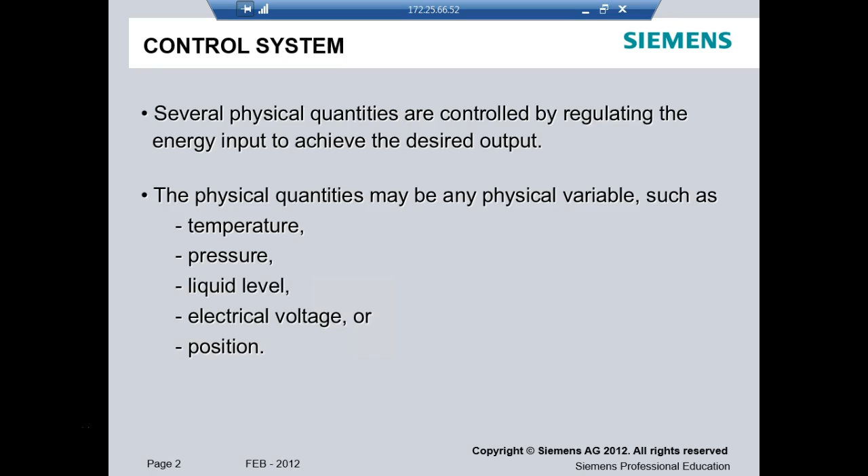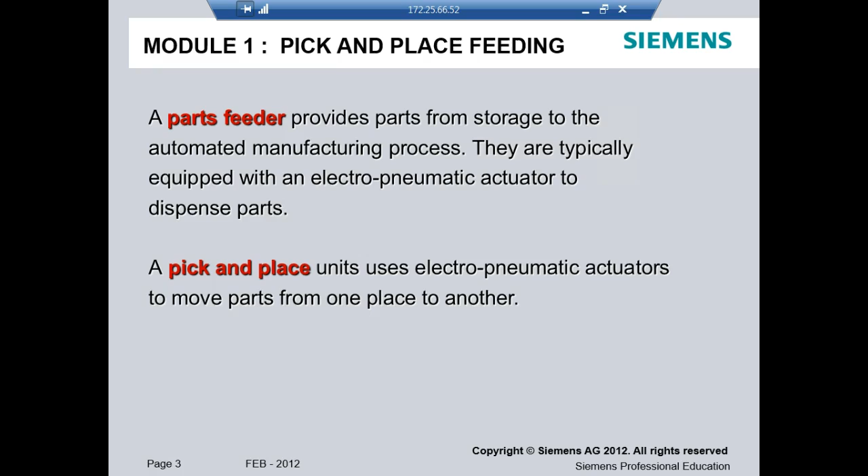You understand that? So what we're going to do is, y'all aren't going to work on this station. We'll look at this station and figure out what it does. And then, yeah, this is module 1. This is the one we'll look at and see how to set up this sequence chart.

And so first thing we need to do is be able to identify what's what, right? So we know this belongs to actuator 1, because it's 1A. So if we see A, it means it's an actuator. And what does an actuator do?

Turns energy into motion, right? Of course, we're using either pneumatic energy or electrical energy. So we have a lot of pneumatic actuators over there, but we also have a lot of motors and solenoids and stuff like that.

Sensors are labeled 1B1, so this shows us this double action cylinder, and then it shows us where all the sensors are. So this is the magazine that we put the blocks in. So right up under that magazine is B1, right? You see it? So if we looked under there, that's the parts present sensor. And then if B1 is present, then we'll start getting in sequence.

So first of all, before anything happens, B1's got to be true, right? Well, that's not really true. What should happen first? Well, first thing we should be able to turn the power on, turn on the outputs, and then what do we do? We cycle it between what?

Okay, and then on this one, you'll have to hit the start button. After that, the whole thing's automated, unless we have it in what we call single step. So what's nice about this manufacturing line is you have the ability to put it in manual, and you're going to single step it. So this is what we'll do when we set up this sequence. We'll step it, and then step it and step it and try to figure out what has to be true.

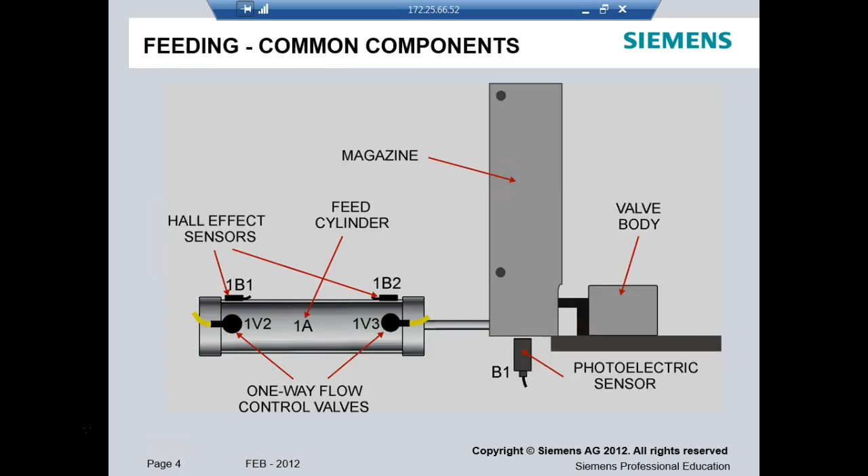And then, of course, so if this guy here is extended, which means there's a part present, right? Because it wouldn't extend it if there wasn't a part there. Everybody okay? Then that tells this guy, and this guy's retracted. Now it should be able to do what? To send this thing down.

And then when it's fully extended, how do we know? How does it know when it's fully extended? Because 3B2 becomes true, right? Everybody follow this? So when 3B2 becomes true, what's it going to do now? Should turn on the vacuum. And then it's got a sensor that indicates if the vacuum is present. But that's the other side of the line, right? Everybody okay?

So this is showing us the parts. So we know here's our Hall effect sensors here, right? And then we can't see the Hall effects over here. This is the B1, it's up under this, and it's pointing straight up. It's a diffuse sensor, so it's pointing straight up and reflecting off the line.

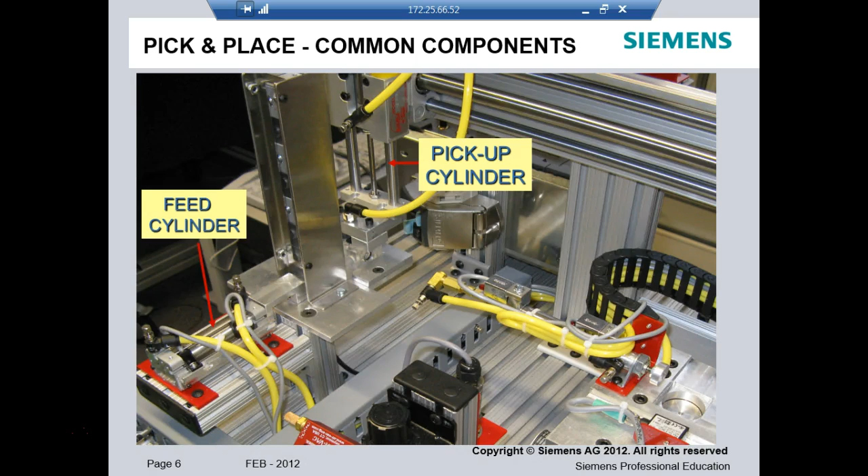And we talked about the vacuum generator, right? Yeah, we actually went over and showed y'all the pressure switch that's on the vacuum line. How does it know it's generating a vacuum? Yeah, what did he read? It's a vacuum switch. Well, it's not. It's a pressure switch. Because if it's coming out the suction cup and blowing straight out, because it's not on it, it's sucking in, it's not up against anything, right? Then it won't be able to generate pressure. Okay. Y'all understand that? How can we get a vacuum from a pressure?

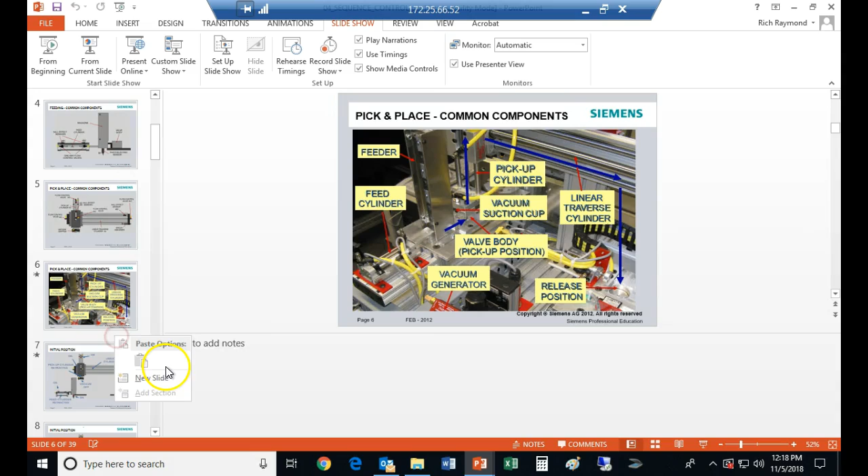A vacuum from a pressure. So this uses, both the lines use what they call a Venturi, a vacuum generator.

Well, sort of. How does an airplane fly? How does it create lift? So y'all don't know how an airplane flies? Really? Y'all really don't? Y'all haven't ever heard this before? Well, what happens is that we enter air into the front of the airfoil, which is the wing. A wing is an airfoil. And if you ever looked at the wing, you'll notice that it's what? You know it's curved on the top and flat on the bottom.

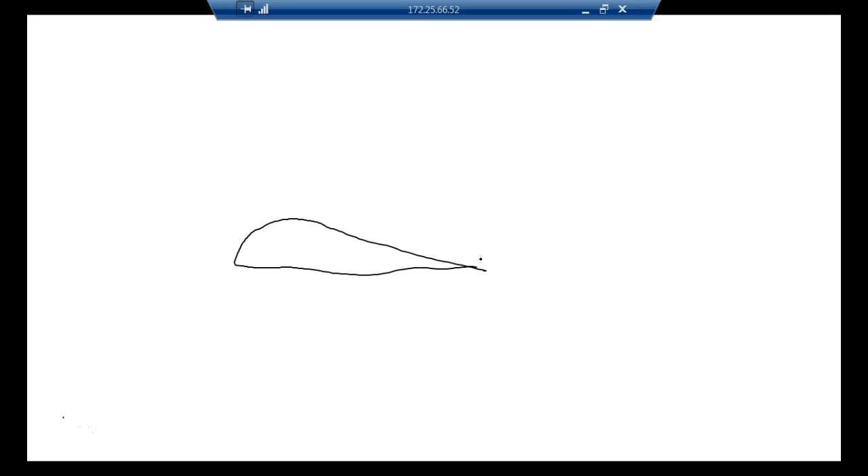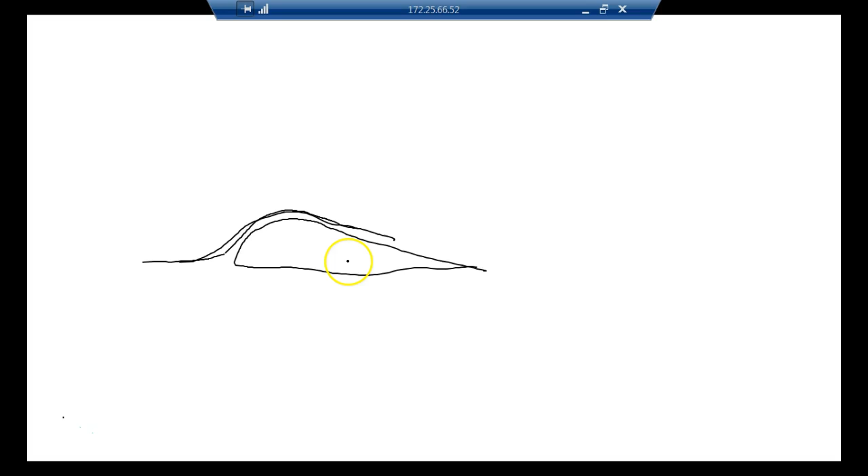So what happens is your air comes up and hits this. This flows over the top, and so this starts moving real fast. So the faster moving air creates a vacuum, which causes low pressure. And then the bottom one comes over here. It's moving straight, so it generates a high pressure. So it going over the top of that wing, that curve over the wing creates a low pressure. On the bottom, we have a what? A high pressure, and creates lift.

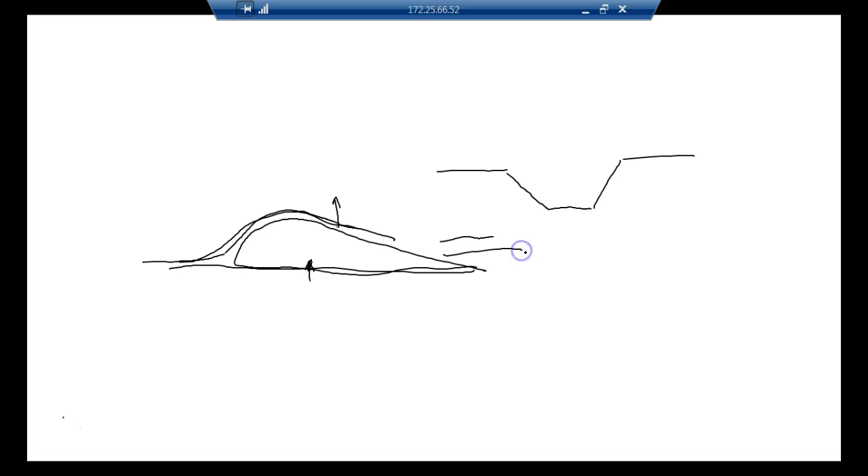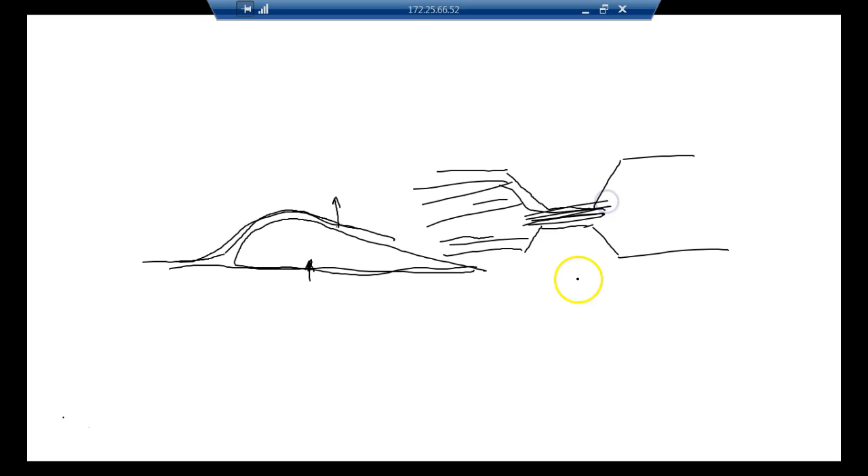So if we can speed the air up through an orifice, then we can create a vacuum. So a Venturi sensor comes down here, narrows down, goes over like this, comes back up, and comes like that. And then the other side looks basically like this. And then when the air comes through, what's it got to do? It's got to flow through that, and it speeds up going through here and creates a vacuum. So we put a little tap right there, and now we got a what? We got a vacuum. And this is what a Venturi vacuum generator does.

So what we do is we take pressure from our compressor. Our compressor don't create a vacuum, it creates a pressure, right? You understand? But we run it through the Venturi vacuum generator, and it generates that low pressure.

We use this all the time, guys. Anybody got a pressure washer? You've got a tub on the front of it. Why doesn't the water squirt up the tub? Because it runs through a little venturi and creates a vacuum. So if you put soap up in the top, what would it do? It'll just suck it right down in there and add it to your water. So anybody's got a pressure washer, basically all of them have that plastic tank on it that you can add soap and stuff to, right?

So anytime we speed things up, then the pressure is going to go down, right? You understand? And we use that all the time. Airplanes, that's the way they fly. It always amazes me that you got them wings out there that creates enough lift to do what? Pick up all of you. And that the wings are the only thing that's technically generating the lift.

The wings on the U-2, I don't know if you've ever seen a U-2 fly before. It was one of our first spy planes. Those wings are so long and so thin that they flop down. When the plane's trying to take off, since it's only got two wheels down the center of the plane, and the two wheels out on the wings are just propped up under there, you can see the wings come up, and then these things go bouncing down the runway, and the Jeep comes up and does what? Picks them up. And when the U-2 is fixing to land, coming down, this Jeep's right behind it. You understand? The pilot brings it down, and they'll jump out and hold the wings up. So the U-2 is a neat airplane.

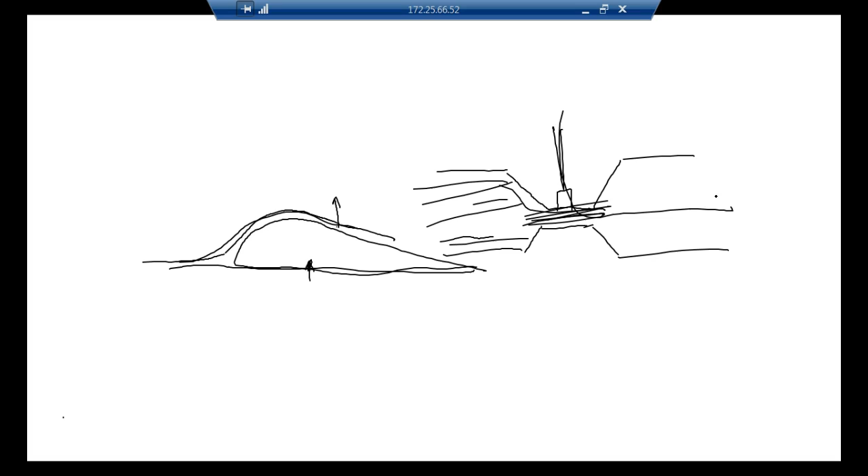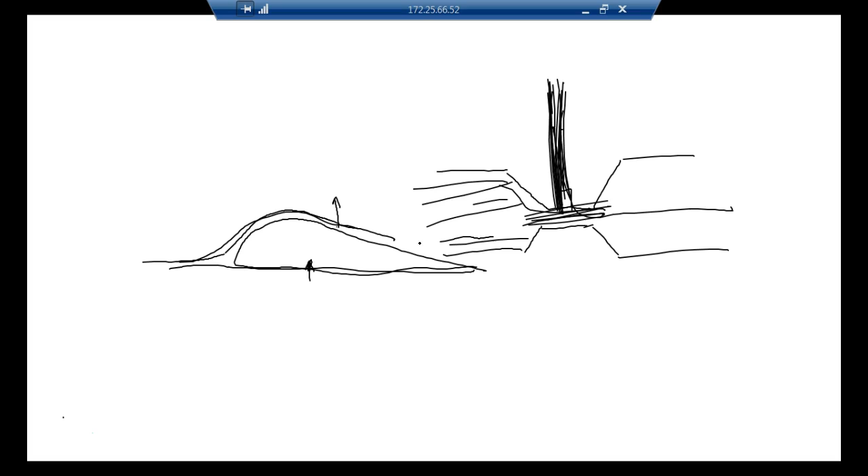So this is the way our vacuum generator works. Well, the problem is if we let this air come through here like that, then it's not going to be able to generate pressure, right? You understand? So that's the way the pressure switch works. The pressure switch is sitting right up here. So it's sensing the pressure, not the vacuum, but until the suction comes down and locks onto something. So we're using a pressure switch, but the pressure switch is sensing when the vacuum is made. And it happens every once in a while, the little vacuum cup will literally come up and flip up like this, and it won't generate a vacuum. It'll just sit there. And we have to bring it back up and flop it back down because it's very pliable, I'll say.

Well, it depends if you take care of them. If you come up here and jerk on them and stuff... we've had the Festo line since 2006. And yeah, it eventually gets worn out. But if you ever notice, they just screw in pretty easy. In fact, we've got one on the Festo line over there. We had one where it wouldn't pick up the blocks, and we thought it was the suction cup because it had a little nick in it, but it wasn't that. Somebody had turned the pressure down on the regulator, and it wouldn't generate enough vacuum to pick up the block.

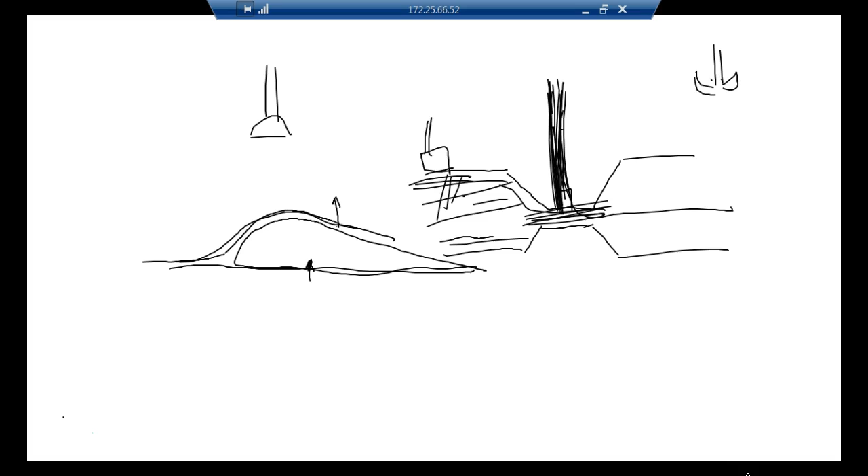So that's the way airplanes fly. So the venturi works on exactly the same principles that airplanes do.

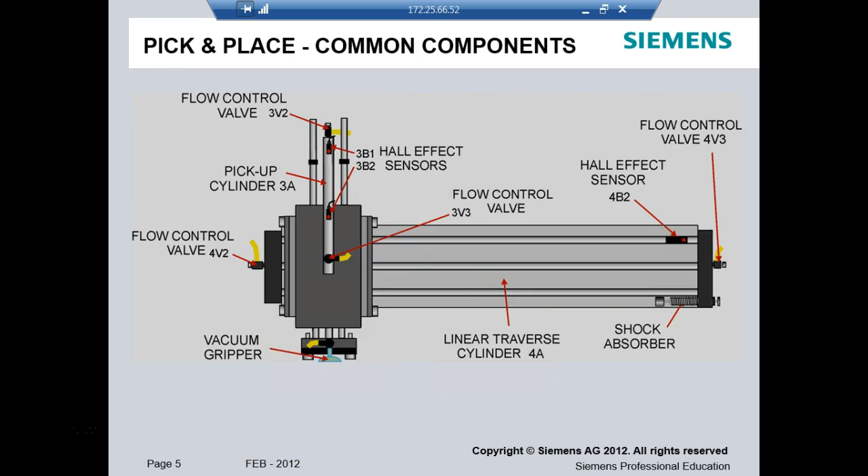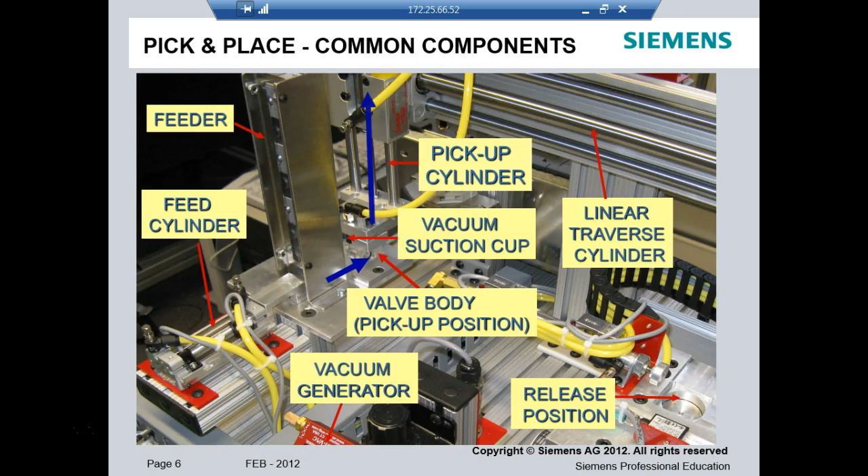Feed cylinder, pickup cylinder, vacuum suction cup, vacuum generator, valve body pick-up position, so it's out, right? Okay, so I think we'll have the actual procedure here in a second.

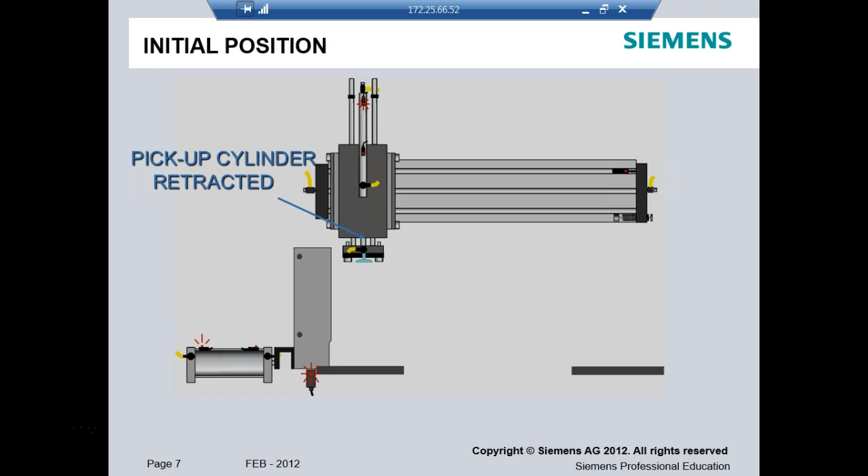So this is where we're starting out. So what's got to be true before we start everything? One, B1's got to be true. It's got to be true, and then of course the one we can't see is the one that indicates that it's on the left. If all those are true, then what's going to happen? It's going to send out the block, right?

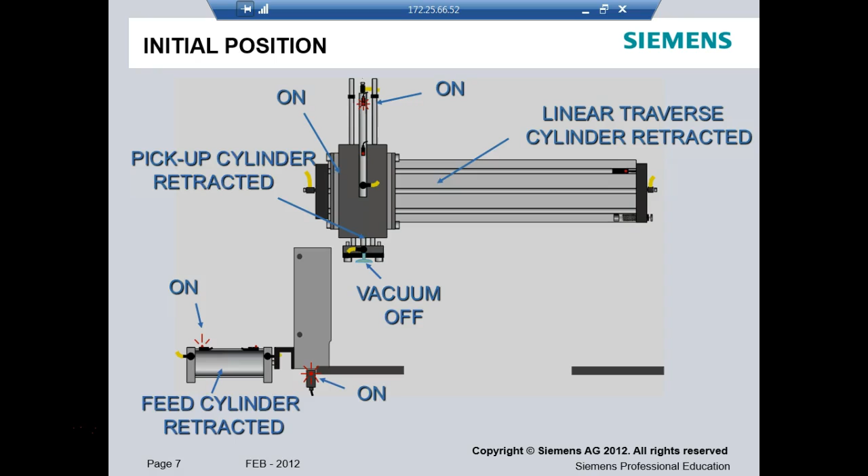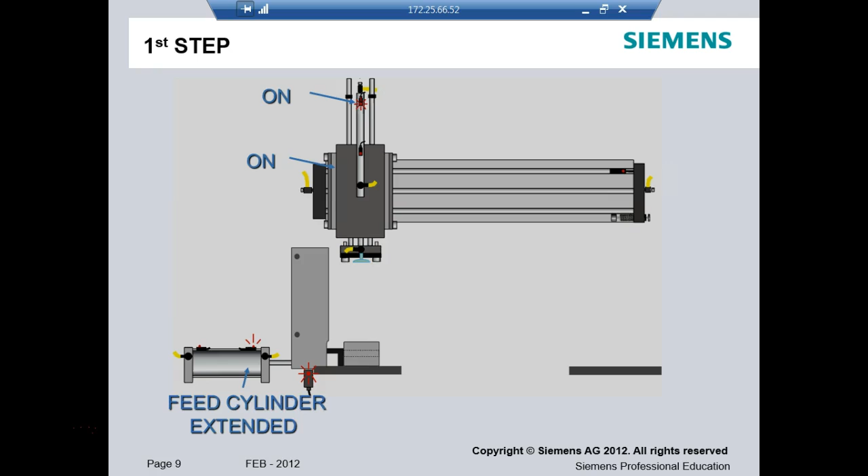Vacuum off, cylinder this, and we're on the left position. If all this is true, then what happens? Send out the block, right? Now, how does it know the block's okay? Well, all of a sudden this guy right here comes on, which says it's fully extended, right? That light is on. Valve body's in place. So what's going to happen?

And it's going to go down, and how does it know it's down? This is still true, this is still true, this is still true. I'm sorry, this one goes false, this goes true. No, it knows it's fully extended. So what's it going to do now? Turn on the vacuum, right? You understand that? Everybody okay?

So it comes up here, and this is on, this is on, this is on, right? So it's going to turn on the vacuum. Everybody okay? Vacuum on. Then what's it thinking? Okay, so the vacuum's on. How does it know the vacuum is on? Because the little pressure switch says it's on, right? Okay, so then what's it going to do?

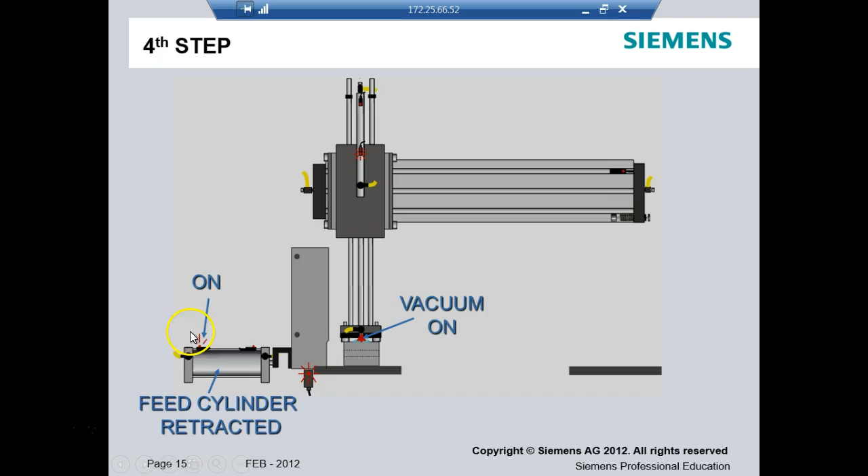Vacuum on, it's going to retract this, right? How does it know when it's retracted? Because this guy here goes true, right? Then what's it going to do? It's going to pick it up. Are we okay so far? How does it know it's up? It knows this guy's fully retracted, right?

It knows there's still a part present, but this guy right here goes true now, right? Everybody okay? So what is it going to do? Feed cylinder retracted, how does it know that? So it's going to move it over to the side. Vacuum is still on, right? How does it know the vacuum is on? Because the pressure switch still says it is, right? Everybody okay? So what's it going to do now?

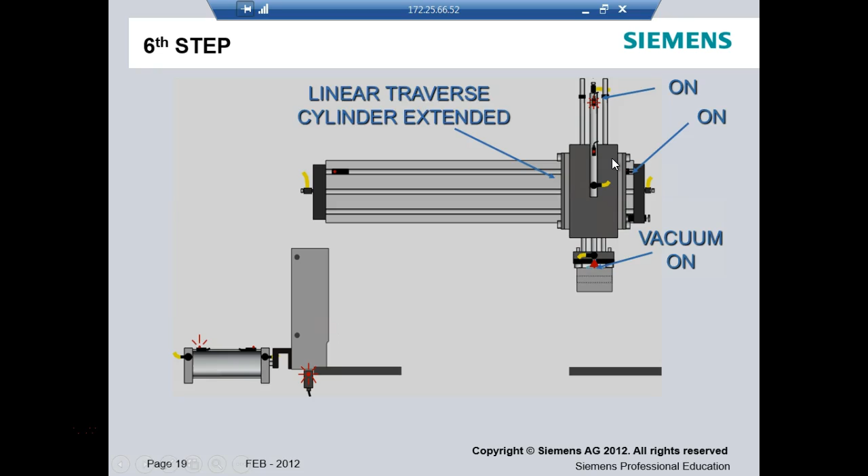Okay, so it's going to come up and now you can see this guy. So now it knows it's all the way on the right because of this sensor right here, right? Everybody okay? And so it's going to come up and do what? It's going to, okay, how does it know it's fully extended? Right, okay, then what's it going to do?

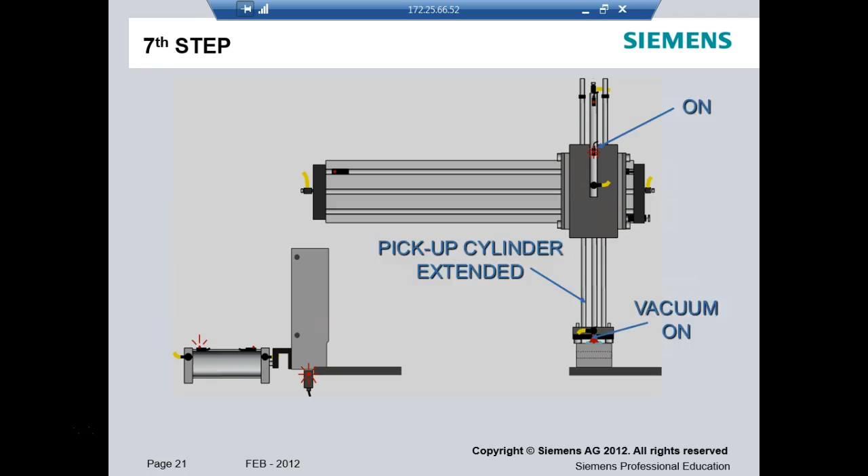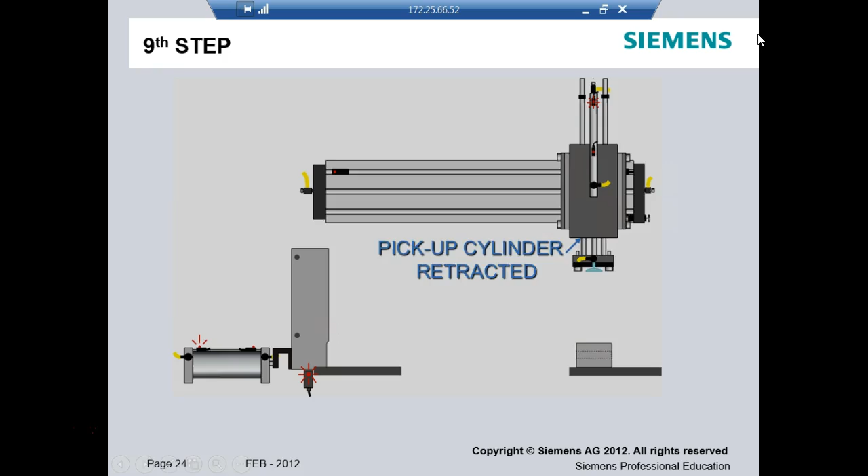Okay, on, right? It's going to turn the vacuum off. Then it's going to retract. How does it know it's retracted? Yeah, then what's it going to do? Okay, pickup, retract, it's going to move over. How does it know it's over? Because of the sensor that it just covered up.

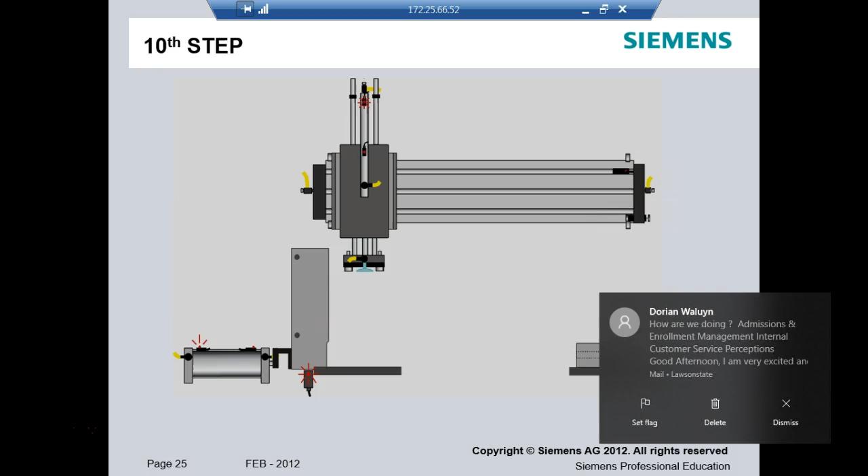And what's it doing now? Waiting on the next cycle. So what we did is we just stepped through a complete cycle, right? Everybody okay? So I really like this line. We can literally, we can put it in manual and press that green button. Every time we press the green button, it's going to do one step, right? Everybody okay?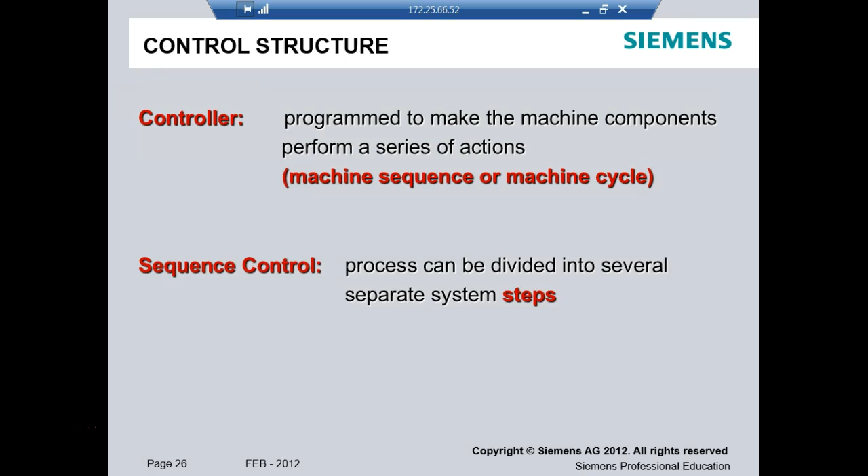So automated systems are basically sequence controls. It goes through its sequence and then it ends up where it started out, right? Everybody okay there? And then it just keeps doing the same sequence over and over and over. We've already talked about this, the three things that make up a control system. We have input, we have the program or the logic, and then sooner or later we're going to generate outputs. Everybody okay?

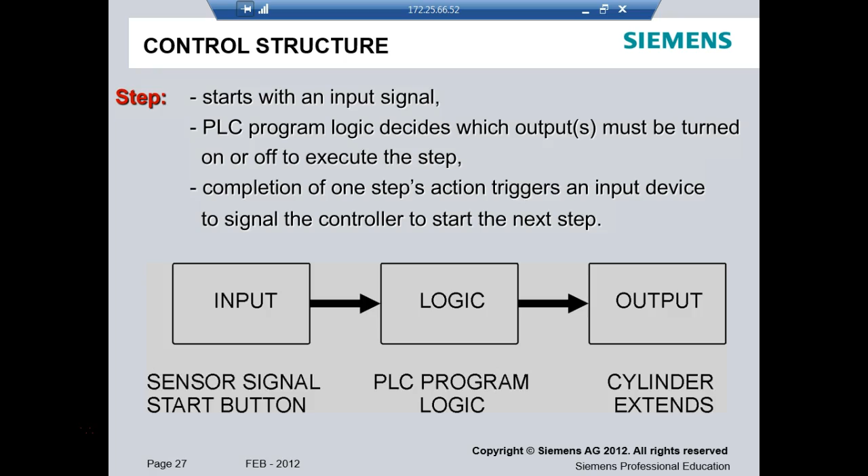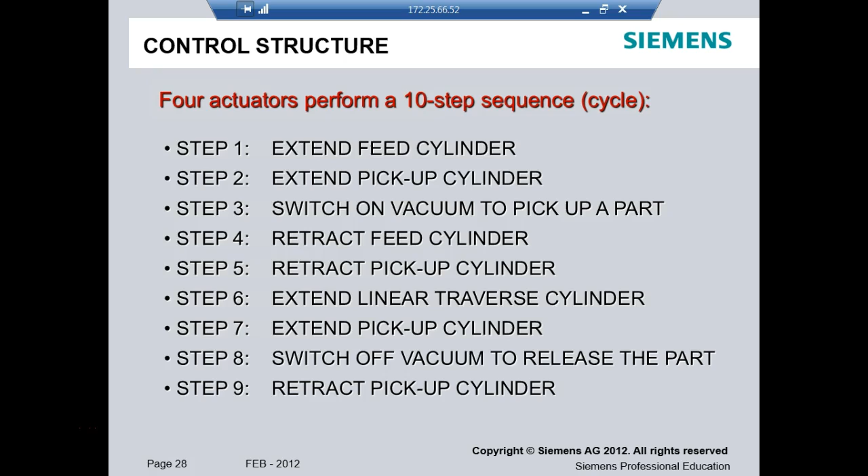So this is the way it's happening, push button, right? So your start button is pressed, PLC picks it up, right? Cylinder extends, PLC runs logic, does this, extends, PLC logic, does this. So this is the sequence, and when it hits the next step, sorry, we still got some more steps.

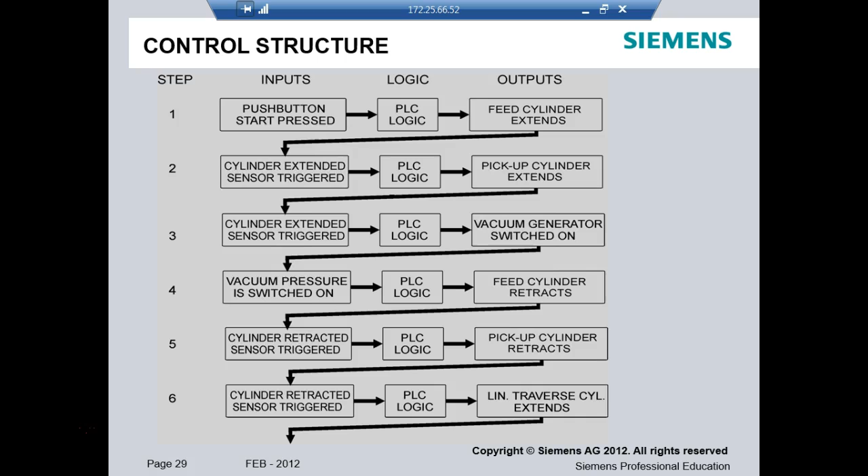Okay, so this is the actual function chart. This is the first thing that we're going to look at. So notice this thing has 6 steps. Now to get into it right here, this says this is what we need to have. It says 10.1, which is 4B1, has to be, and B1, and the little up arrow means 'and,' right? So it means they all have to be true. B1 and 2B1 and 3B1 and 1B1. If all these are true, then it'll go into step 1, right? Does that make sense?

So what does it do during step 1? Well, what it's going to do is turn on output Q4.5, which is going to cause what to happen?

Okay, and how does it know? What effect does this have? Well, 1B2 should become what? True. Everybody okay? This makes sense.

Now down here, this says this is what's required to get into the next step. What you notice, what this guy affected was what's required to get into the next step. So 1B2, which is hooked up to input 1.3, and we'll show y'all that. If it's true, then it falls into step 2.

Step 2 is going to output Q4.6, which is going to cause what to happen? It's going to cause this to extend, which is going to affect what? 3B2. If 3B2 is okay, then it's going to fall down into step 3.

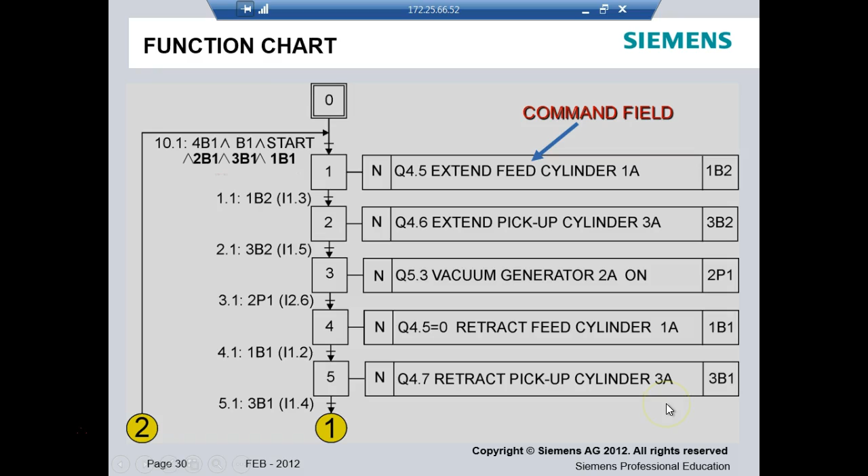Everybody okay? Of course, they run out of room, so they put some dots down here indicating it's going to continue on the next page. When we go to the next page, we'll look for the number 1, and we'll look for the number 2, right? Everybody okay? This makes sense so far.

So we got into step 6. So to get into step 6, then 3B1 has to be true. 3B1 is true, then it's going to turn on Q5.6, which is going to cause what to happen? It's going to extend the traverse cylinder, which is actuator 4A.

And how does it know it's extended? It's going to activate 4B2, right? Now follow me so good. If 4B2 is okay, we're going to move into step 7, which means what?

Q4.6 should turn on, which should cause the pickup cylinder to extend, which is actuator 3A, right? You understand that? Which is, how does it know it's extended? 3B2 will become true, right?

Everybody follow this. If 3B2 is true, then this is going to get us into step 8. It's going to turn on output Q5.4, which should turn what?

Generator off. How do we know? How does it know it's off? 2P1 says it's turned off now, right? You understand? And then it comes back in here.

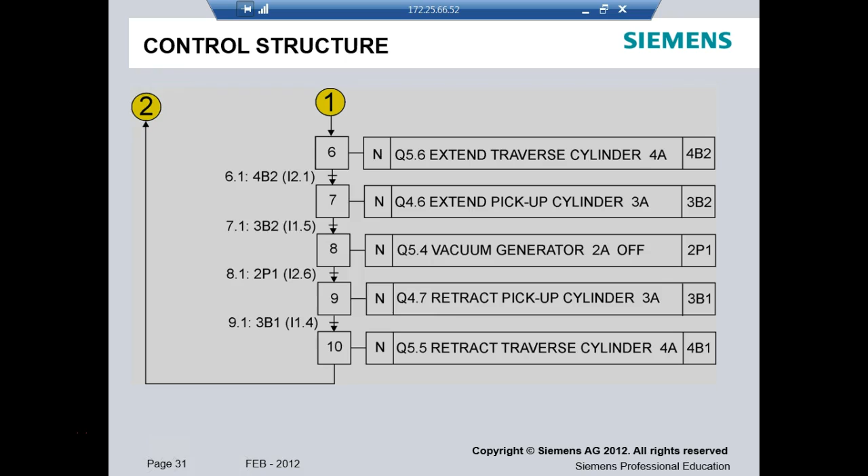It's going to retract the traverse cylinder, which is 4A, so it's going to move back over to the left. How does it know it's on the left? 4B1 becomes true, right? And then it does what? Then it goes back up to here, right?

That makes sense? And if we got it on auto, the start should be true automatically, right? You understand? If we don't have it on auto, then it's going to take all this stuff up here again, right? It's got to be all true, and then you got to press the start button, which is what you're going to have to do for manual.

So guys, this is a function chart. So I got this thing down here, and the pickup cylinder. Like I said, the first time I taught this class, we put a bug in the problem.

Guess what the guys did? The guys started all the way up at the very top. Is that where you're supposed to start at? You're supposed to find where it stops and then figure out what's required to cause it to do it, right? You understand? So let's say this guy right here did not retract.

Well, you'll figure out why 1B1 didn't go true, right? Why didn't this go true? Well, it might be that this guy here never retracted, or something's wrong with that sensor. And that's the beauty of these function charts, is you don't have to check the thing that you know is good. How do you know they're good?

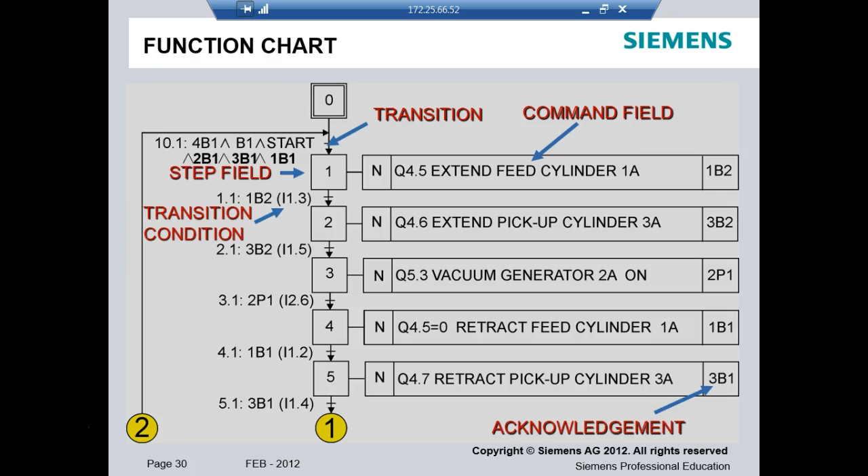How do you check? How do you know that sucker is perfectly aligned? As close as we can do. What would y'all look at? All right, you mean all of the...

So this is the information that we get with our manufacturing line. I think I have this all put together though, guys. I think... no. We get an overview, and of course it gives us a picture of the station.

Well, what we're going to provide with y'all - one thing that I like about the Festo line is it actually labels all the sensors. The Amatrol line doesn't label the sensors. Some of the same sensors that you saw in the Festo line, I see the same numbers on the Amatrol line. Well, it's not the same, it's the same numbering system. So that's a standard numbering system when you set up a circuit like that.

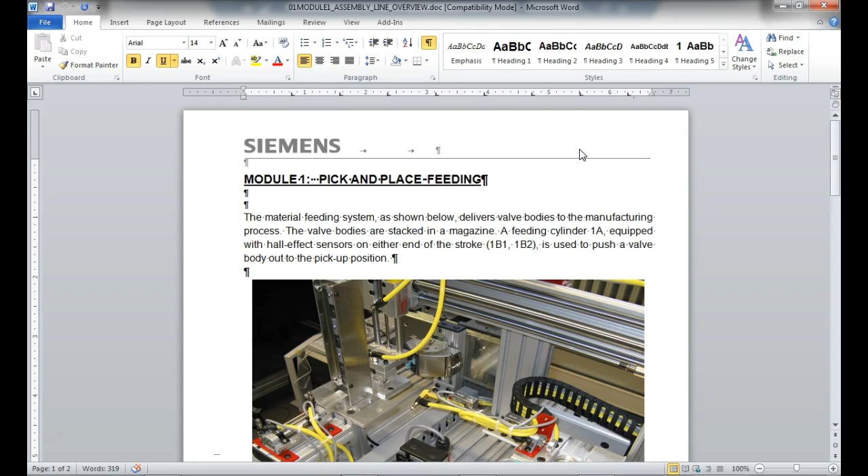So we got the B's, they indicate they're what? Sensors, right, or proximity sensors. A means they're what? I'm guessing now.

So just about every circuit on the Amatrol line and the Festo line, its function in life is to run an actuator. Because what does the actuator do for it? Yeah, it changes energy into motion. Of course, we got two forms of energy - what's our two forms of energy over there? Pneumatic and electrical, right? Those are two forms of energy.

So what they do provide, and I've run these off - depending on which section of the line you get on, and we're not going to work on 5 because that's the robot section, is that I've run these off individually. So what are these pictures right here going to do for you? The sensors are, and how they're labeled, right? Because you know when you do your function chart, that's what you're looking at.

So you go over there, you figure out what sensors are true before you press the start button the first time. And then that's what's going to be required to get into your first step, right? You understand that? That makes sense?

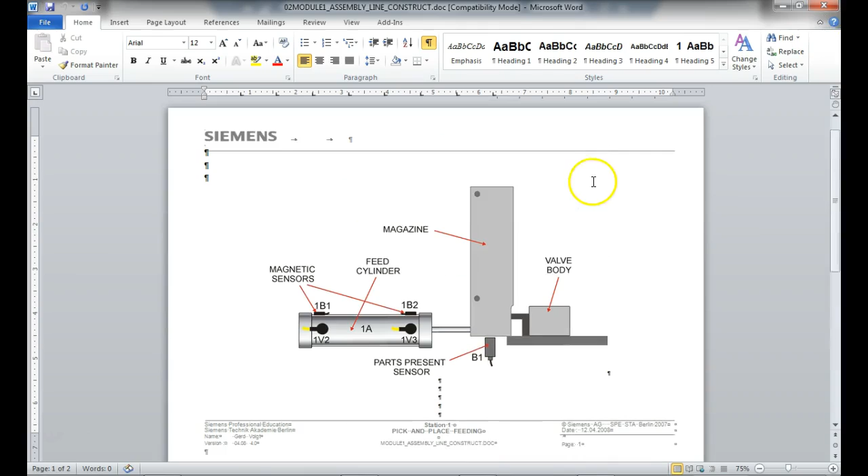So we have these for each section of the line where you can come in and identify what sensors you have. But these guys, these are pneumatic diagrams.

So these are some that we've already looked at. This is standard. If I brought up the one for the Festo line, it would almost be identical to this, because just about every circuit here is in there to run an actuator. And either the actuators are going to be electrical or pneumatic. They're predominantly pneumatic.

So the way it starts off, we have our service unit. This is called 0. Then from then on, this right here would be the first circuit. This is a directional control valve. What's M?

M is solenoids, so this is solenoid actuated spring returned. What's V? Valve, right? This is very important to know because this is the way a standard print should be laid out, top to bottom, left to right. It should be laid out basically the way the line is, so my first actuator is on the left and the last actuator should be toward the right. That makes sense?

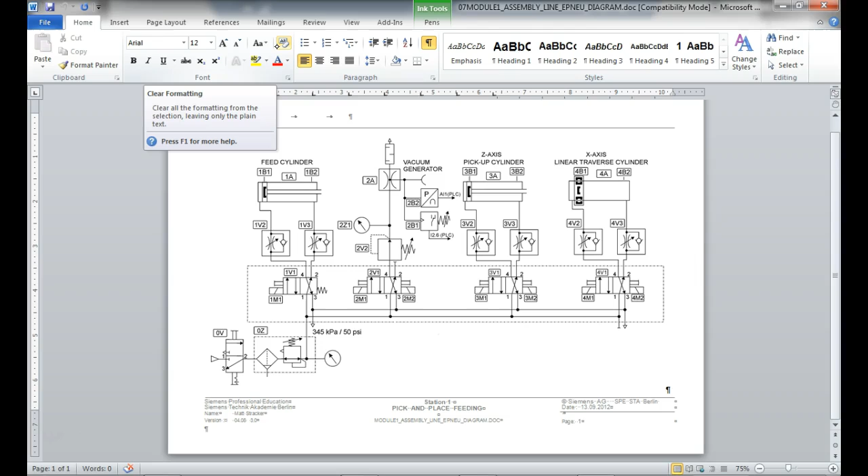So this is a Word document. I was looking for my PowerPoint. Yeah, I was trying to write on it. I can, but it's hard to do with the recording software.

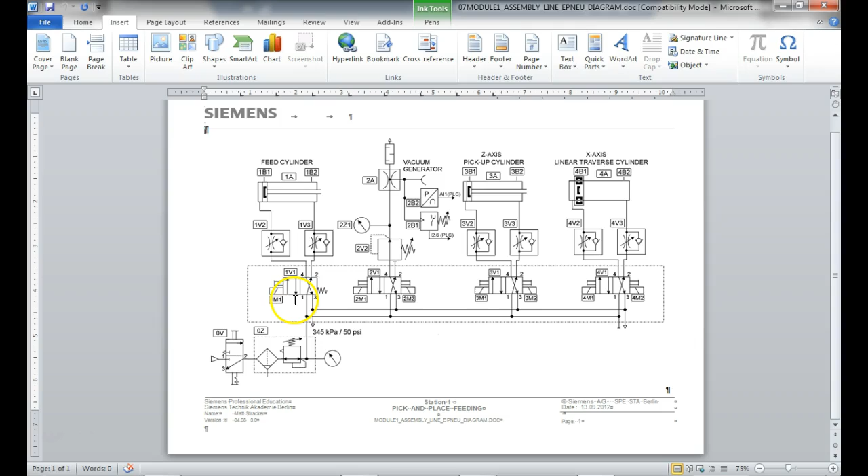So this is a directional control valve. And what's this symbol right here, that little white thing sticking up there? Manual override. Every one of these we can do a manual override on. And then we even have those on our relay.

These are unidirectional flow control valves, which means they only flow one way, and we're doing what we call meter out, which you can tell by looking at the check valve. This is called a check valve. The check valve basically only lets the fluid flow in one direction. If that arrow was pointing up, that would be meter in, but the arrow is pointing out, so this is what we call meter out. What does meter out mean? We talked about that the other day.

So the problem we have with pneumatics is if I was to push on that side, what's the air going to do as soon as the cylinder moves? It's going to uncompress, right? So what would happen? It would always be jerky. So what we do is control the flow of the exhaust, not the pressure of the exhaust. So now that cylinder's always pushing against something. The flow control is trying to keep the flow from flowing, and your pressure's trying to push it. So what happens is you always work against back pressure.

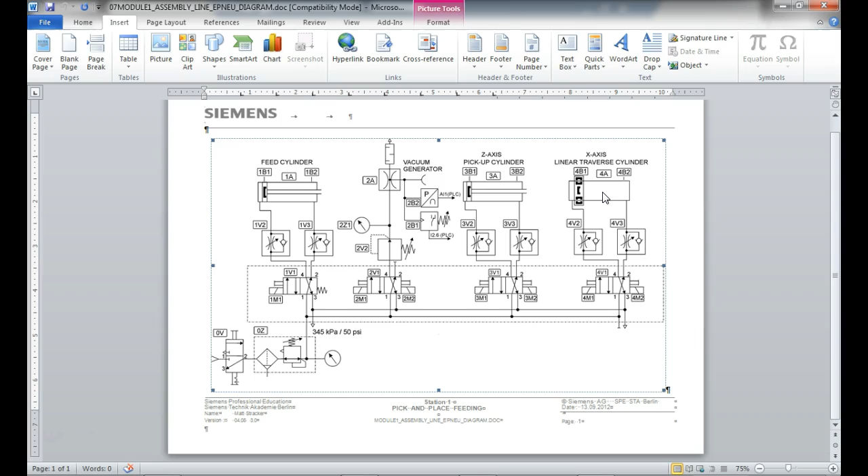So we've got pneumatics, we've got electrical. Of course the electrical is going to give us the actual way the PLCs are lined up. I think this is this one, I get them confused every time.

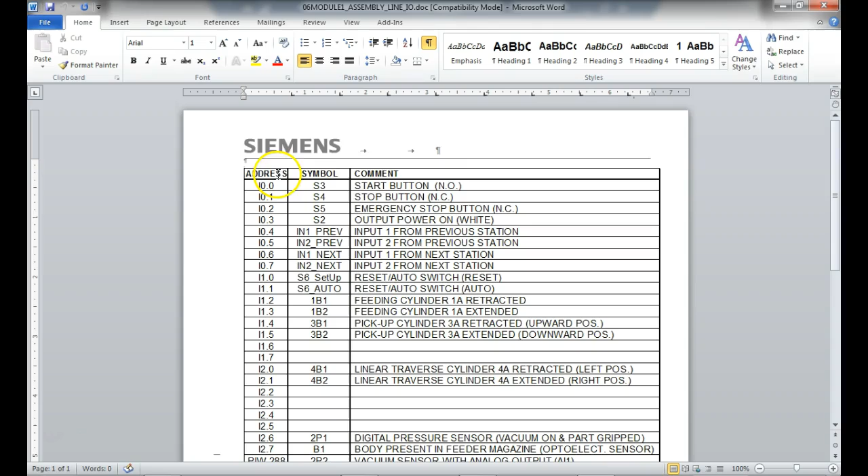No, this actually shows us what I/Os are assigned. So I want the other one.

Yeah, but we don't normally put these manuals up, especially while we're doing this lab right here. And why is that?

Because you would look at these function charts. These function charts are in there. The step charts are in there. What we're trying to do, guys, these don't have to be right. What we're trying to do is just give you the experience of developing these things in case you got somewhere that didn't have them, and now you have an idea of how to develop them. Some of them are complicated because they have different paths it could go depending on what happens, so you have a loop.

You come up here and you decide which way it's going to go. So let me find my PowerPoint, trying to find my bump out.

Well, we're going to be in lab. I mean, is there some reason you have to leave every class early? Every class. Last time you told me, but you didn't leave.

Well, yeah, you need to make appointments with her when you're out of class.

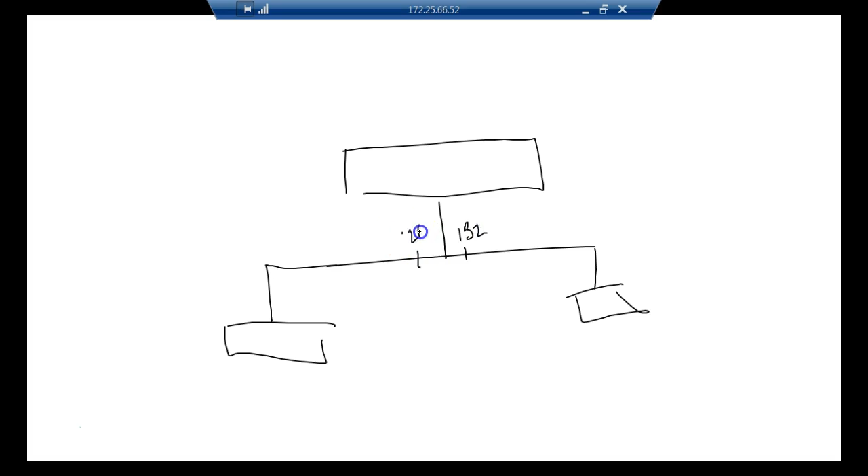So what we would do if we had a section is we would come down here and split it up, and then we come down to flow charts. Then you would put what's required to make it do what. So here it might be 1B2 is false, and over here it might be 1B2 is true. And if it's false, I think we put an overline or underline, I can't remember. That way you can indicate that your function chart goes two different directions.

But eventually they're going to do what? Eventually they're going to merge back up, guys, because they got to come back up to the start, right? I understand, that makes sense. So if you look at the conveyor belt, if it's metal, it goes one way. If it's ceramic, it does what? It goes another, it gets a different cylinder. So that's the way you would split it up into two directions.

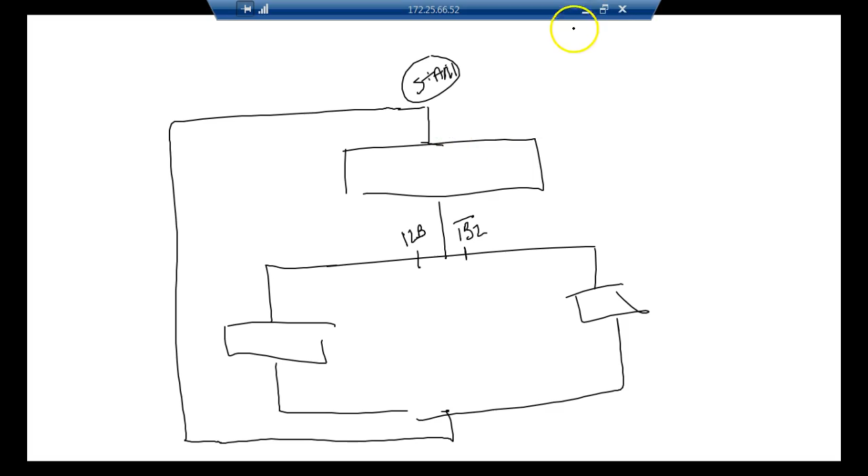Steps go across the top, right? If this will load... it says it's open somewhere. Oh no, this is not one.

So the actuators move between the steps, right? And that's basically kind of different from the function chart. In the function chart, the actuators move in a step, and then we put what's required to go through that. But a step chart, and we don't have step charts for the Festo line, one day we're going to try to do that.

So this is the step chart for the pick and place section. It starts at that first one that starts track. Well, no, not yet. What we do is this is what's required.

So what has to happen? 1B1 indicates that it's retracted, right? 2P1 says I don't have pressure. 3B1 says this guy's retracted. And 4B1 says this guy's retracted. Now if all that's true, then what can it do?

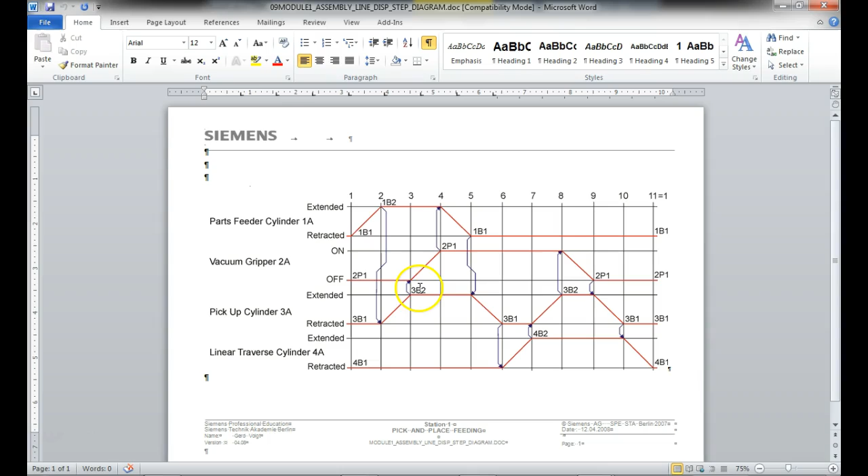2P1 is not true. What happens between step 2 and step 3? The pickup cylinder extends. And then once it's fully extended, it causes 3B2 to go true. And what does 3B2 affect? Well, 3B2 affects actuator 2A.

So what's happening between the steps is what's going on with our actuator. This is what's required to cause it to move to the next step. But what happens between the lines, inside the block, what's happening? This is when your actuator direction is moving. That makes sense?

And these guys, which one do you prefer? Well, different people have different strokes for different folks. So if you have both of them available, then you choose the one that you're more comfortable with, because both of them is going to help you go directly to the...

So what happens if it don't do step 6? You look at what needs to go, okay, so what's got to be the problem? Well, probably 1B1's your problem, because that's the only thing that's required for us to move to step 6. Which is pretty neat. So that's why I like both of them.

I don't prefer one over the other, but when we were learning these up in Tennessee, every group had ones that they liked best. But instead of doing what they did, we're going to give y'all each a shot at making a function chart, and then we'll go over there, you'll present it to your class. And then we'll rotate around, and we'll let y'all do a step chart. That makes sense?